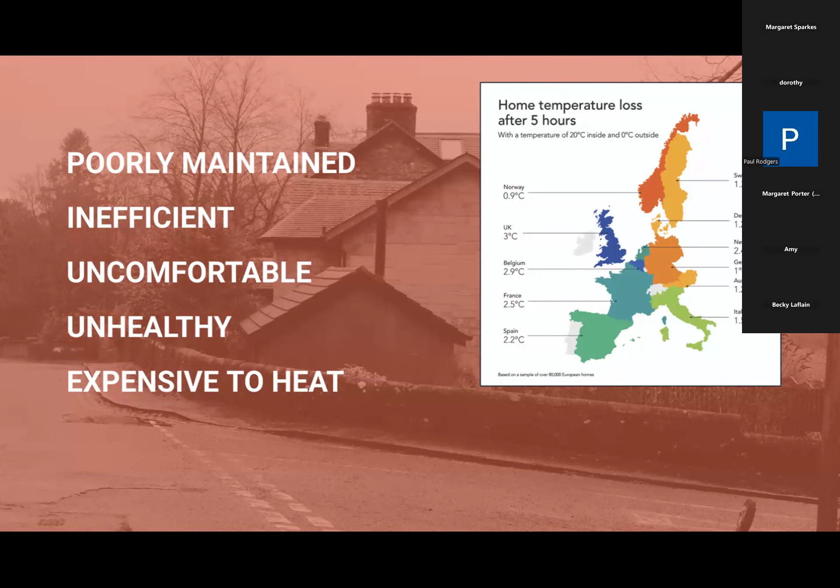And in addition to that, we also have homes that are not in a great state in terms of being poorly maintained, inefficient, not necessarily very comfortable or healthy, and I think most people will agree that they're fairly expensive to heat. And we also know that compared to our European neighbours, our housing stock is quite poor, and the thermal performance of our housing is quite poor.

And because the vast majority of homes that will exist in the future have already been built today, we know that we can't demolish and new build our way out of this. The only option really is to retrofit our existing building stock while making sure that we're building new homes that are low carbon and energy efficient. In other words, the only option we have is to retrofit.

So retrofit is a combination of two words, means to retrospectively fit, and you might retrofit a ship, bring it into dock and bring it up to date, perhaps it's a military vessel, but we're not talking about ships, we're talking about homes. And so for today's discussion, we're saying that retrofit is fitting new energy efficiency measures and renewable heating into an existing building.

And the three dimensions that we like to talk about is low carbon heating, which in almost all cases means installing a heat pump, insulation, and ventilation. And the great news is that when you do this, you bring a whole lot of benefits, improving the issues that I mentioned a few slides ago. So it's going to be a more comfortable home, a healthier indoor environment, lower environmental impact, and lowering your bills, almost certainly.

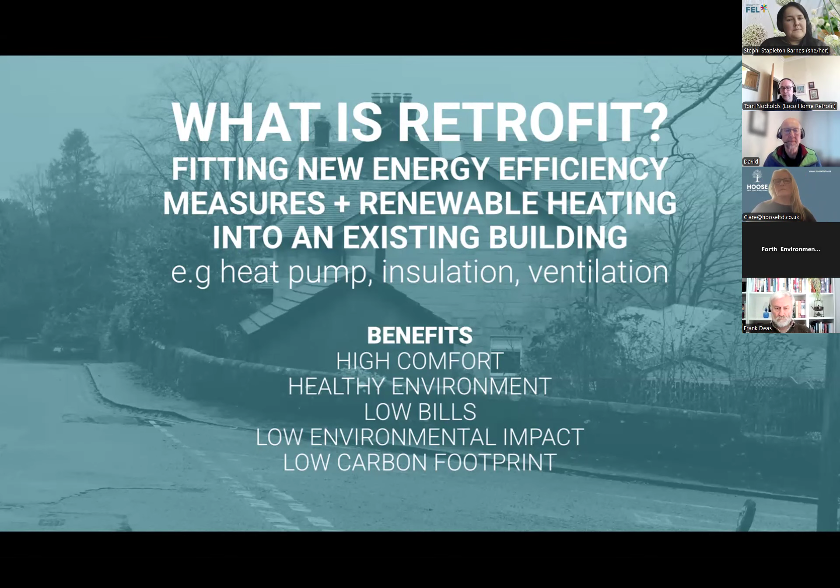The problem is that retrofit is expensive, complicated, risky, and it's just generally a really difficult process. And that's why Loco Home exists. That's what we set up to do. And our mission is to make better retrofit more accessible to more people with a strong focus on locally in Glasgow.

And we're a climate change organisation. Our primary purpose is to address that 34% of carbon emissions that comes from our homes. And the way we view it is that it's definitely warming. It's definitely us. We're absolutely sure about it. And the situation isn't great, but there's definitely things that we can and should be doing.

And in light of that, I think that really you've got a choice as an individual or a household to do nothing about the fact of climate change or do something. And importantly, if you don't engage with this and you make no decision, you don't do any planning, you are doing nothing. So it's important that people understand that climate change is something we should respond to, and that they really should be making plans for.

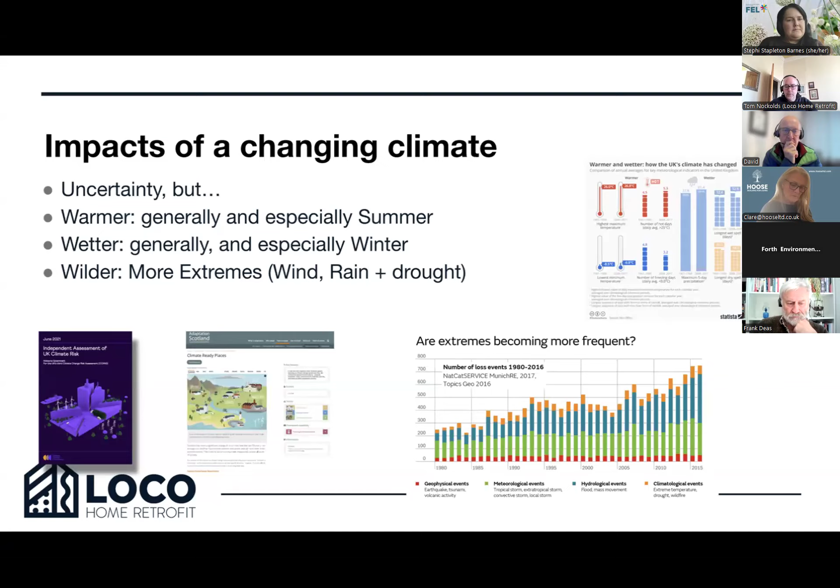So I'm going to run through for the next maybe 5 to 10 minutes. I'm definitely not going to be running over on my time today. I know that's not even an option. But I'm just going to be running through that structure: warmer, wetter, wilder.

And these slides are a bit of a repeat of the content that's in that document, and a bit of a repeat of the material that Chris Morgan presents in his webinar. I'm not trying to repeat what Chris is doing in his webinar. I'm merely trying to introduce this resource so that people understand what it covers and why it's so valuable.

I should say that I'm not a building expert. I'm a community social entrepreneur, and anything that I'm saying today should not be taken as advice on what to do for your specific home. This is just general in its nature, and I'll refer you back to the original report.

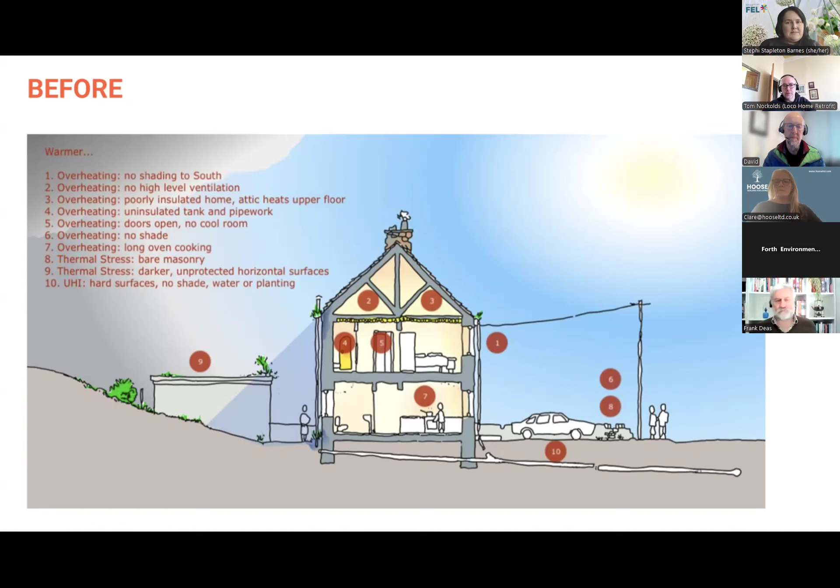So for example, to counteract overheating, we need to avoid situations where we don't have shading, that we don't have a lack of ventilation in our homes. A well-insulated home is also going to protect us from the heat coming in. We need to make sure that we're avoiding situations where there's no shade, introducing heat unnecessarily into the house through things like long duration oven cooking, and looking at the materials of our buildings to make sure they're up to increased temperature extremes, and making sure that in our broader urban environments we've got less hard surfaces.

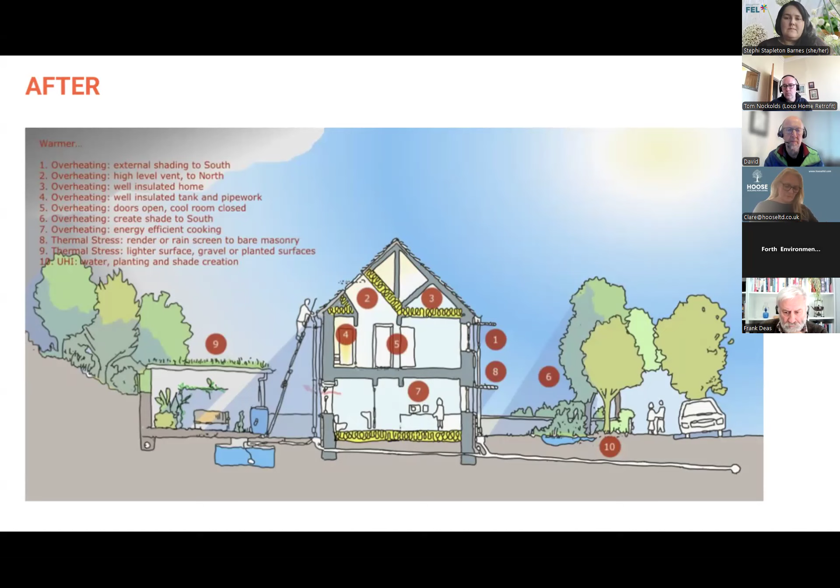You can see the same house with all of these measures, all these issues dealt with, starts to look a lot different. We've got much less hard surfaces, we've got more trees, we've got better maintenance, we've got the insulation. We're putting in relatively straightforward measures like green roofs, and we've got water buffers and water storages in the environment.

In terms of wetter, what we know is that a wetter and warmer environment means that we have more plant growth, and that can cause issues, particularly when we have uncontrolled plant growth growing in or near buildings. More likely to have rain penetrating into the fabric of the building. That can happen for a variety of reasons, because rain is being driven against the surface of a building, because it's splashing onto the surface of the building, or the drainage system, rainwater goods are not up to the job.

We can have increased wetting and drying cycles, which makes it even more important that we're using breathable, vapor permeable fabric in the retrofit of our buildings. In some circumstances, we need to be making significant plans for how we deal with flooding. In all circumstances, we need to think about flooding.

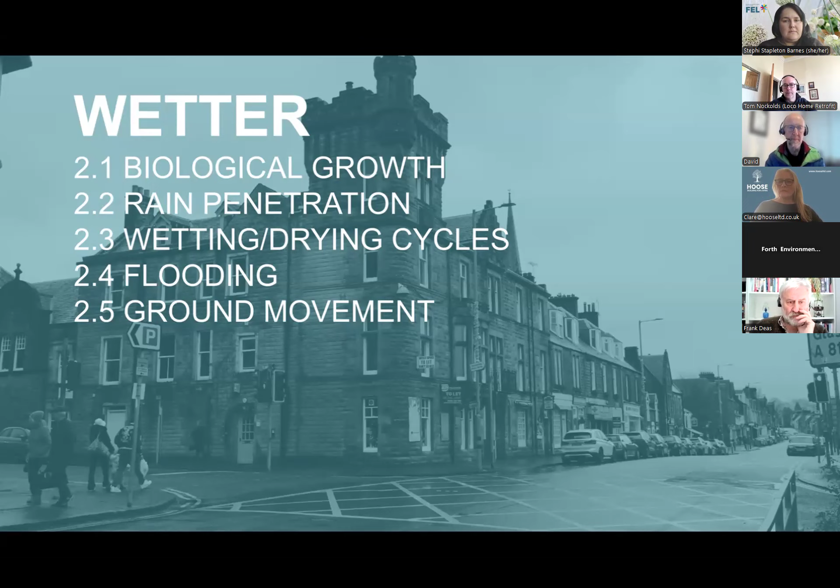And for some houses in certain locations, we need to be really mindful of ground movement, so things like slippage of land or worse. And so again, we've got these two diagrams, and I'll jump to the second one because it's kind of nicer to talk in a positive, but we can see we have fairly straightforward measures that we can do. A lot of this is about maintenance, making sure that we've got good access for maintenance and our homes and the surrounding environments are well maintained.

So good fixing points for maintenance, good access to drains, make sure that you're maintaining your roof and your gutters to remove plant material. Make sure that your home is well ventilated, because if water is going to be getting into the building at a higher rate, it needs to be able to get rid of that moisture. The roof is absolutely critical.

In some circumstances, you might need to consider new surfaces on the external of the building to protect against driving rain. We might need to think about changing some other more design features of the buildings to prevent rain from reaching the surface of the building as well.

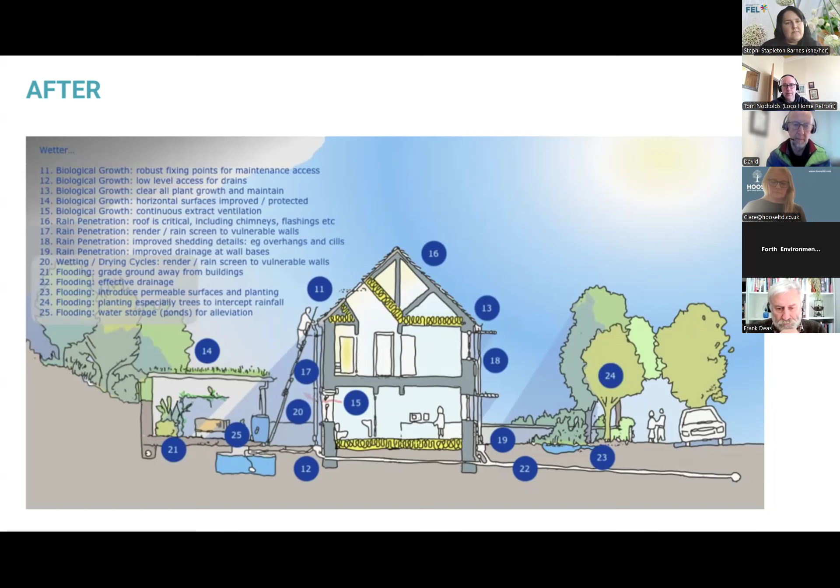And then in terms of flooding, there's a bunch of local things that we can do. Make sure that we've got effective drainage, try and create soft surfaces that soak up the water. Planting trees is always a good idea. And there's a key point that Chris makes, that while there's some small number of circumstances where trees can be a problem, particularly in wild weather, that's only a really small issue compared to all of the benefits that trees bring. We definitely want more trees in our environments. They help with a bunch of these problems.

And then finally, things are going to get wilder. Things are going to become unpredictable. A lot of things we've spoken about, we don't necessarily know when they're going to happen, but we know that when they do happen, they're more likely to be more extreme. So perhaps hard to believe, but there is increased chance that there's going to be droughts, even in Scotland, and there's things we can do to prepare for that. And we've more recently experienced some pretty serious storms: Storm Éowyn earlier this year, and then the storm that impacted the East Coast a year or so before that.

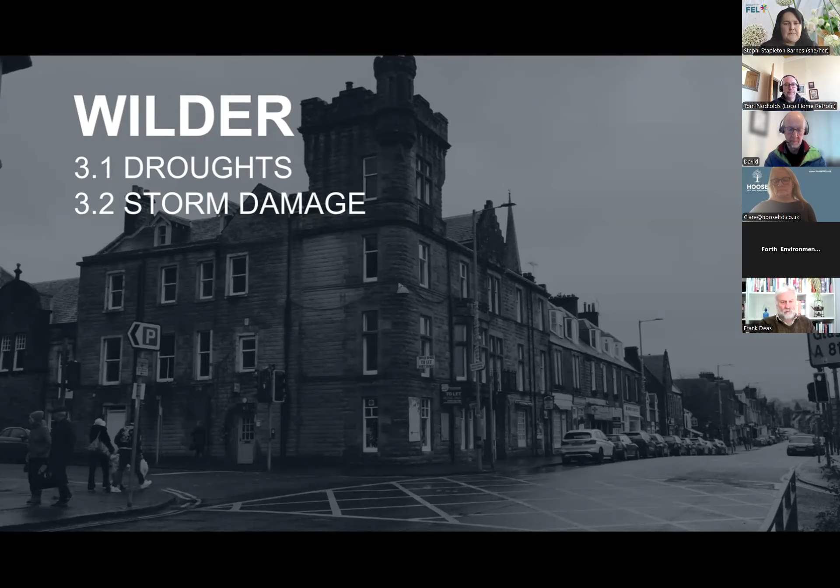So a lot of this again is about maintenance, but when we think about rain, how can we store that for later? Perhaps people in Scotland and the UK are going to need to start thinking more like Australians think, where you need to have local storage of your water in your garden to be able to water your gardens. What are the sensible ways to use water in these environments in the case that a drought was to come along? And we just generally need to be making our homes a lot more robust.

And I think the point that Chris makes is there's a lot of things that are common sense. You can walk around your house and just use your powers of observation to identify the things that are likely to be a problem in a storm event and try and resolve those before the storms arrive.

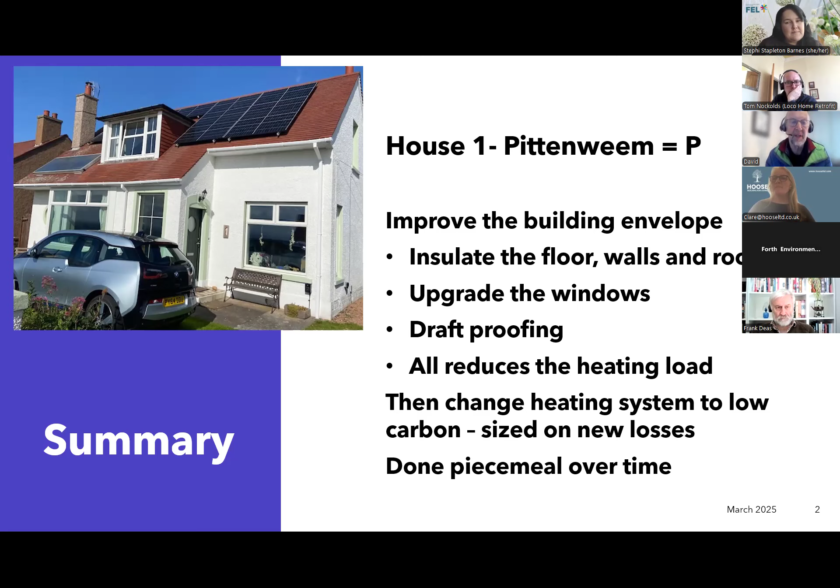So looking at the first house, we improved the building envelope. We insulated the floors, walls, and roof, and we upgraded the windows, improved the draft proofing to reduce our heat load. This was done over 20 years, and we did it piecemeal. We then changed our heating system to a combi boiler. Then we changed it to a heat pump, and that was done after we installed triple glazing on the front of the building.

So house 2 is in Callander, and we had different priorities. So first thing we did is we spent a year investigating the house. We did thermal imaging, we did an air pressure test, and we did nothing for a year. And now we've had a new roof, which makes us a bit more stormproof. We've installed solar PV and battery, and we are installing an air source heat pump.

As I speak, we are 9 degrees centigrade in the house. I'm sitting with a little fire next to me because we've taken our boiler out and the new radiators are going in right now.

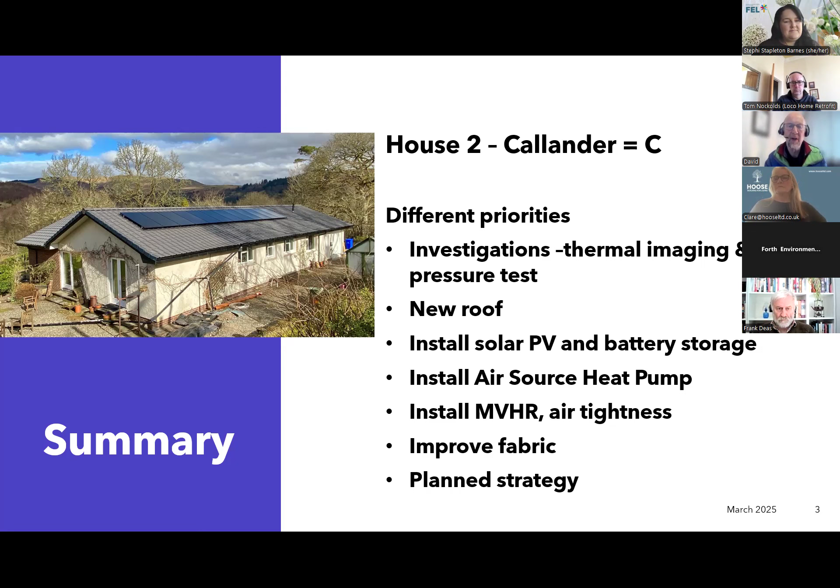I will be installing a mechanical ventilation heat recovery system, and we'll then be really improving the air tightness. Then we're going to be improving the fabric, which is a planned strategy. It's not the normal way around of doing it, but that's what we're going to be looking at for this house. So what do the investigations look like?

The left screen shows the door sealed up with the fan test to pressurize the house to 50 pascals and then depressurize the house to 50 pascals. I then went round with a thermal imaging camera at the same time, looking at where cold air was pouring into the house, and then went round the outside when we pressurized the house to look at where hot air was pouring out.

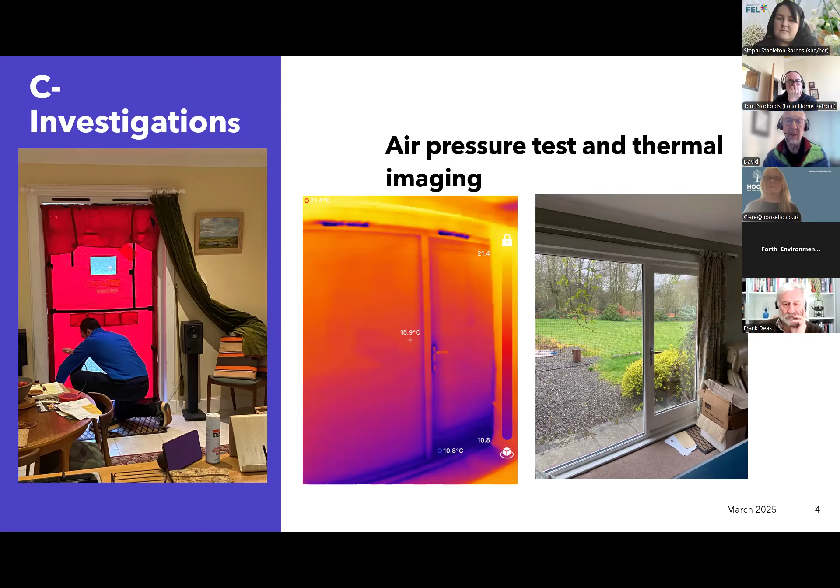So here you can see the trickle vents showing a dark image, and then a lot of drafts around the bottom of the door for this particular patio door. And that gave us a lot of very valuable information about where the air leaks were and where the cold spots were in our house.

Going back to Pittenweem, we started pulling it apart. When they put the triple glazing in on the left, you can see the cavity wall insulation in the middle of the wall, and it's very partial at that point. So one of the guys putting the windows in filled all those gaps and made sure that was okay. So we had it commercially done, but this was about 15, 20 years ago.

Under the floors, we went through and my wife spent several weeks under the floors, carefully fitting polystyrene up under the floors, and that made a big difference. So that's what that looked like in the solum underneath the ground floor. So we used polystyrene for that.

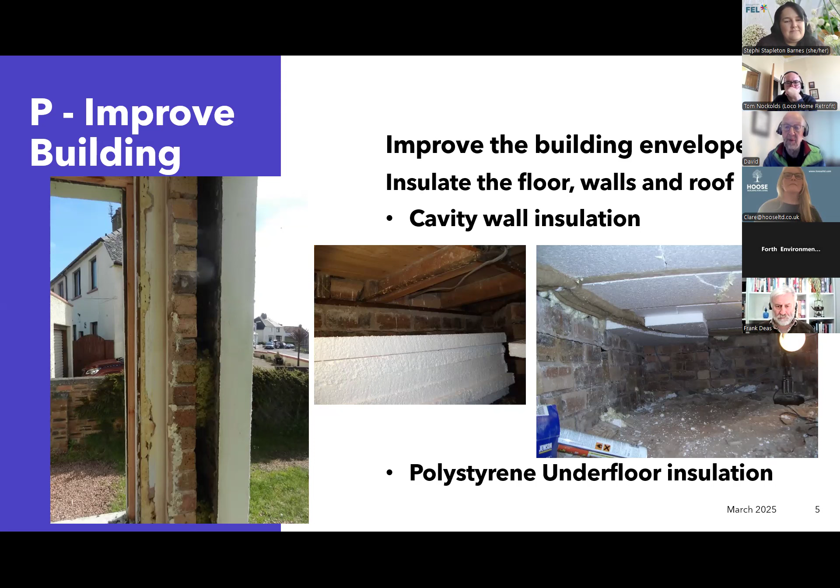Upstairs, we pulled all the plasterboard down and installed Kingspan. So in that ceiling and a coombed area, and we tape sealed all of the area, put the plasterboard back, and then replastered. So fairly invasive stuff, but it made such a huge difference.

I did it after we stayed at a friend's house who'd done that themselves, and it was so nice to be in their house, whereas it was cold in ours. So the bedroom stays cold in summer and warm in winter.

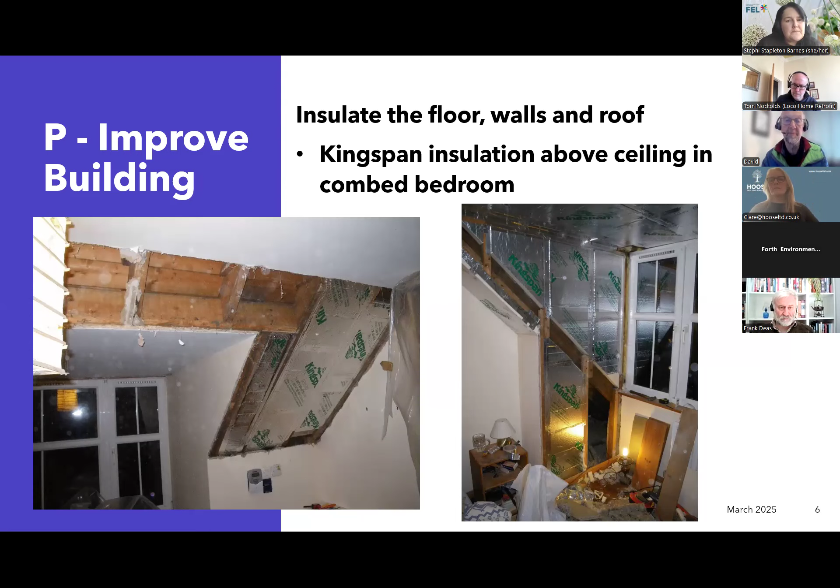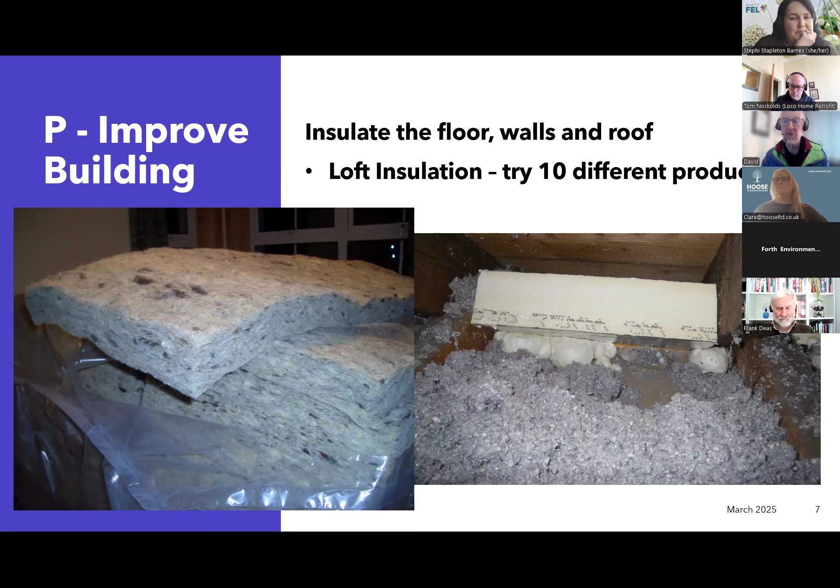And then in the loft, we tried 10 different types of products. I worked as a sustainability manager at the University of St Andrews, and I wanted to know about these products for putting into the university. So we had Thermafleece and Warmcel, which is newspaper that's been shredded and is a work of the devil. I wouldn't go anywhere near it again.

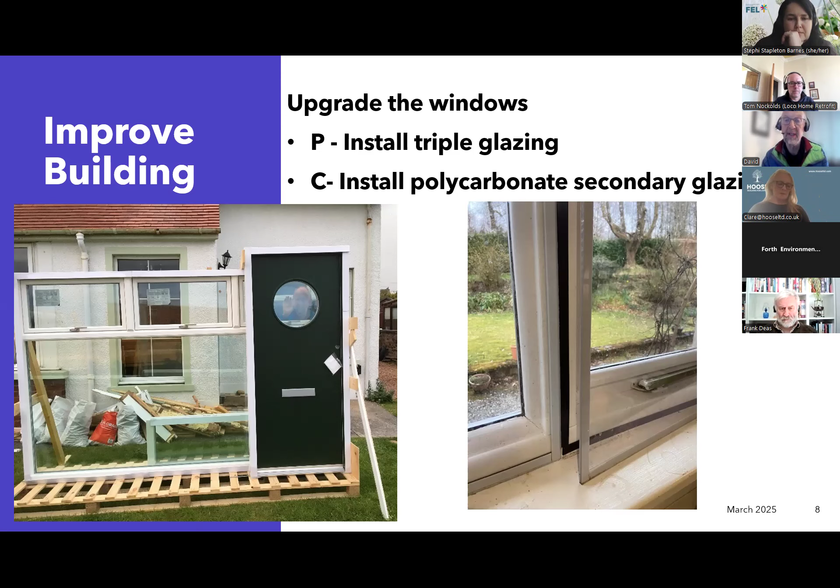Here, in Pittenweem, we installed triple glazing, spent a lot of money, high exposure house. We needed it to minimize the drafts. And in Callander, I'm just very cheaply installing polycarbonate sheets, cut to size, and stuck on with sticky back magnetic strips. Very easy to remove, and that's actually made quite a difference here. So that was a very simple thing to do.

So we then improved the heating system in Pittenweem. We had the solar thermal panels on the roof, a heat pump. We were looking at air source or ground source, and then solar PV, which lowers the carbon but doesn't lower the heating in the house.

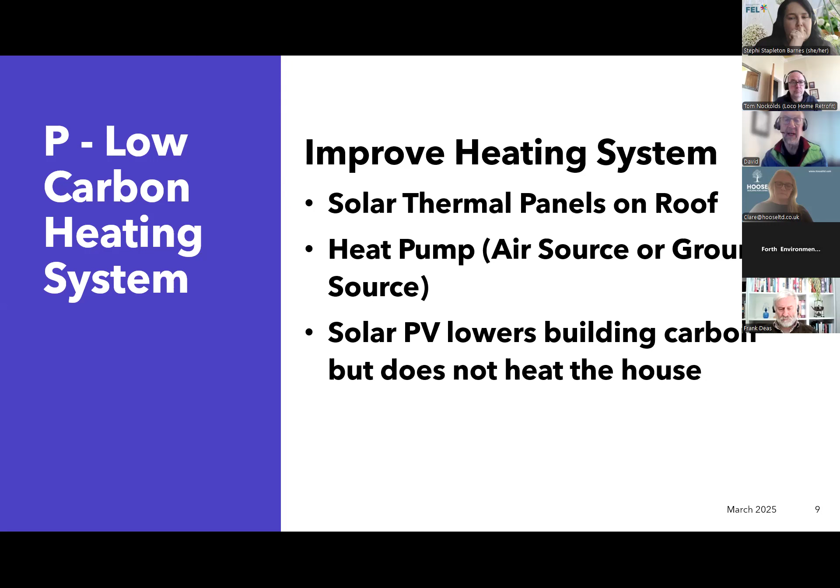So solar thermal, that was the solar thermal panel, which we put on fairly early on in Pittenweem, and it achieved 75% of our hot water demand throughout the year. It is really quite effective. Even in winter, it was bringing the tank temperature up from 10 degrees to 25 degrees, so that the other heating systems didn't have so much work to do.

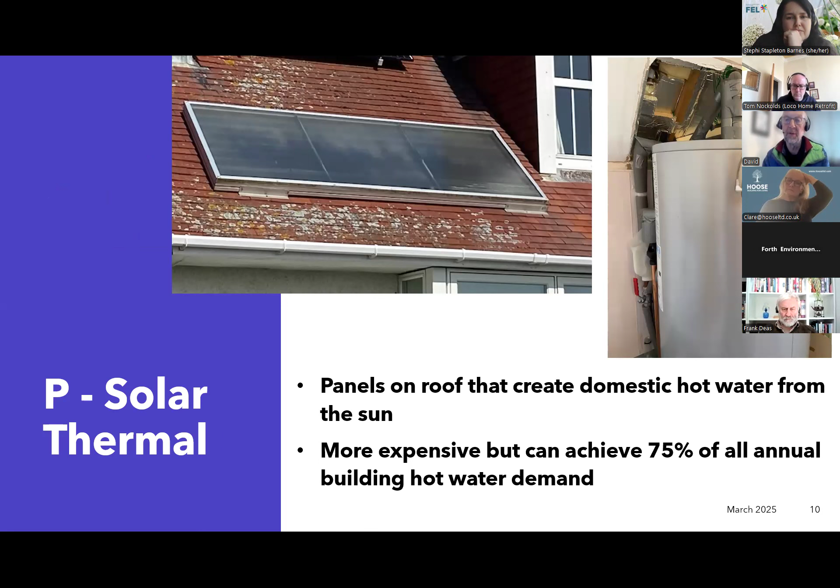So that was good. And then we installed a 7 kilowatt heat pump and oversized radiators. At low temperatures, the radiators need to be about 3 times the size. So we put a lot more radiators in. We were worried about it being overpowering, but actually you don't notice them after a while. And you get a very low temperature, cozy heat.

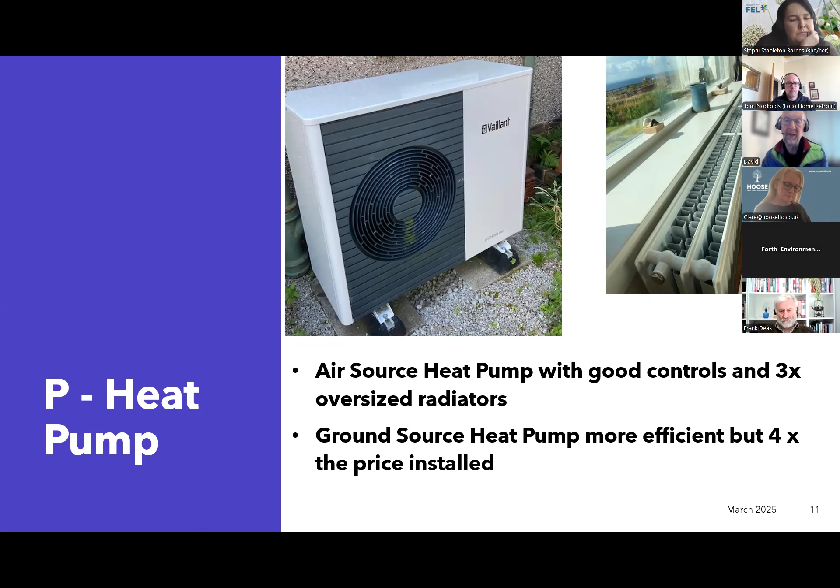It's really nice. We did look at a ground source heat pump, but it would be significantly more expensive to do that, to drill the boreholes, and the efficiencies wouldn't have made a payback for it. So we put the solar PV on, generating electricity for free, and then a small battery system in our loft, which stores the energy for when the sun was not shining, as that was the strategy for that house, so we could then use it during the day.

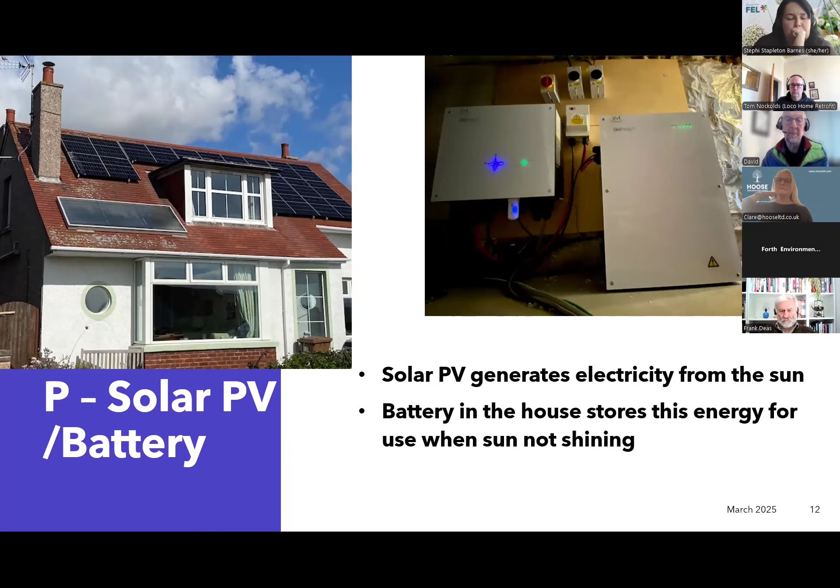For Callander House, we've got a larger roof, and so we've installed 5 kilowatts of solar PV panels and a 13.5 kilowatt hour battery, which is significantly larger than the last one. This one, we're paying 8p a kilowatt hour at night, and we actually get 15p per kilowatt hour to export our solar.

So we're using the battery to charge at the night rate and run our house, run the heat pump when it's on, and the solar goes straight to export during the day or tops up on the heat pump. So the system will also power the house in an electricity cut. So we have a lot of resilience now. Being a rural house, we do get power cuts from seconds through to several hours, a couple of days, and we'll be able to run the house during the power cut.

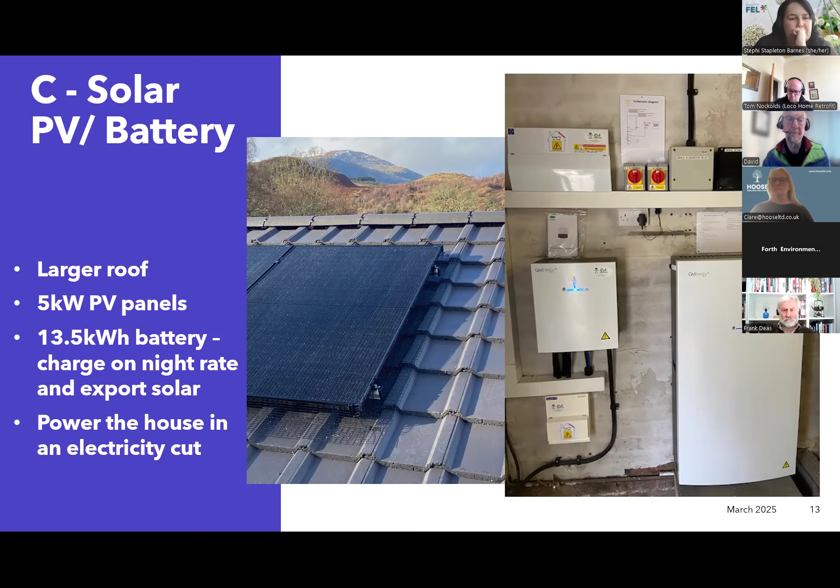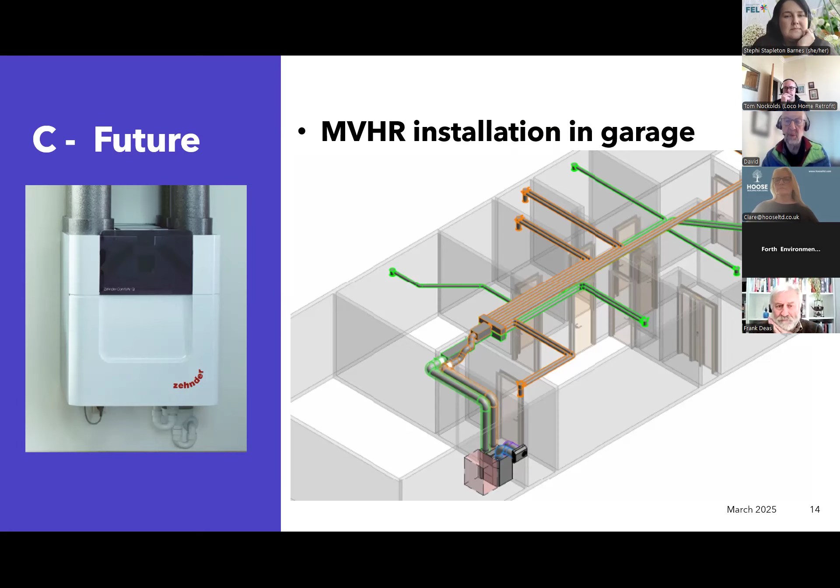And the future for ventilation, I'm going to install this mechanical ventilation heat recovery system. It's going to go in the garage. It's all being designed out. When the heat pump's installed and everything's back to normal, I'll then go and put that in the summer. We're going to have to clear all the loft insulation to do it properly because we want to airtight the loft. So we're going to wait till it's a bit warmer before we move that, and then we'll put all the insulation back in our loft.

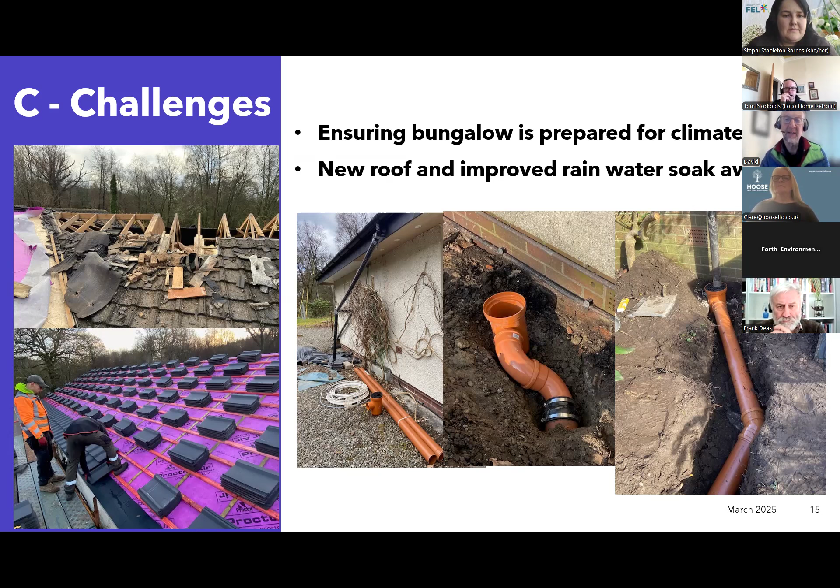So what were our challenges here? So again, we're trying to prepare our house for climate change. So this is the roof going on to our bungalow, and we were looking at our rainwater soakaways, which didn't cope during deluges. So I've redug all of the pipes and relaid the pipes to make sure that they're all running freely and that the water can get away from the house. And then on the front of the house, we'll be storing that water remotely for use in the garden. But we just needed to make sure that, again, the house has got big overhangs, a lot of ventilation in the loft there.

Challenges here, going from natural gas to a country house where we're working on LPG with a big tank, a 2,000 litre tank. And it was sort of weird trying to work out our heat consumption. I'm used to having lots of meters, and here you're just photographing a dial and working out that 50% of a tank is about 7,000 kilowatt hours stored in it, and then you could see it go down.

But for us, once we've got the heat pump in, we're going to get the tank out, and they will only remove it if it's under 5% full. So we've been eking out the gas at the moment till the installers arrive, and it's now virtually empty. So the boiler went out on Monday, but that coordination bit was something that hit me, and I hadn't been aware of that before.

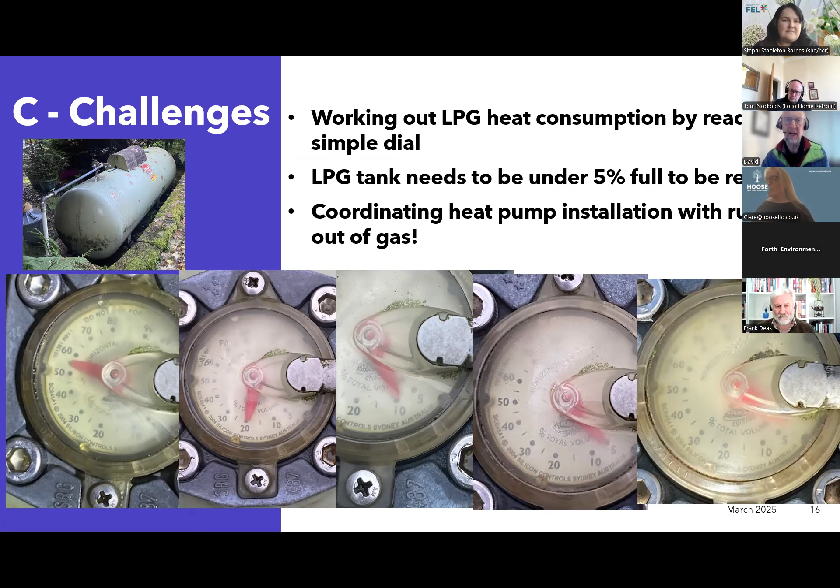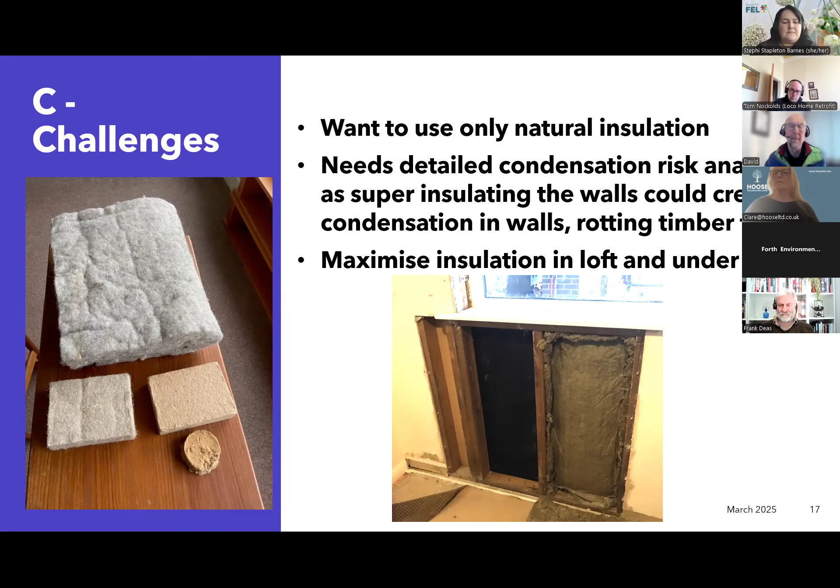But in the meantime, we're maximising the loft insulation and the underfloor insulation. So as soon as the guys are finished with the heat pump, we'll be under the floors working on that. As a comparison between the two houses, the Pittenweem house was 107 square meters. The bungalow's bigger.

The Pittenweem house was 1950s brick and cavity. The 60s was a cedar-clad frame, which then had an external brick put on it. We're very wooded and sheltered here, very noticeable in the storms that the wind passes over, whereas in Pittenweem it's very, very exposed. We had mild winters in Pittenweem, very rarely got frost, whereas we get a lot of frost here in Callander, and three times the rainfall. So we've got a weather station up monitoring that, and it's much, much wetter here.

So we took Pittenweem from an EPC of E to an EPC of A, and we've bought a house with an EPC of F, and we're going to bring it up to as high as we can. I'm not too sure what it will be. We're saving the planet one house at a time. And in terms of heating loads, we halved the heating load. This house has a higher heating load, and we're not too sure what we're going to get it down to, but we'll be using the heat pump. The annual bills in Pittenweem were only 450 in the last year we were there, so that's nice news. I like that. And we'll be working on getting our bills down here.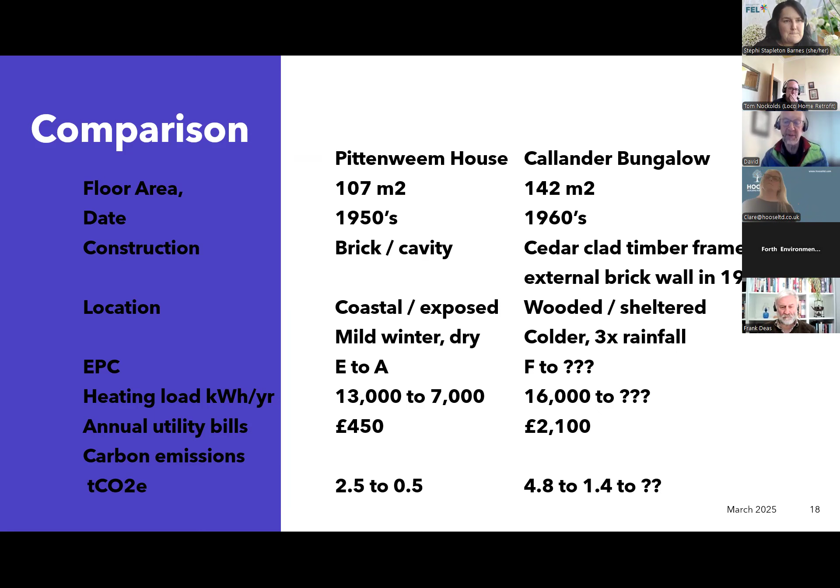So it's interesting what your motivation is. Do you want a cozy house? Do you want to adapt to climate change? Do you want to minimize your annual carbon? Or do you just want lower bills? Because a natural gas combi boiler with large radiators will actually reduce your bills, but it won't reduce your carbon. Then there's the supply chain ethics. Did we want a Tesla battery? No. We were offered one, but we went to a different company. And also we want to support as many of the local contractors as we possibly can.

Looking at the embodied carbon of an upgrade, we did think about knocking the bungalow down and building a passive house, and actually, no, that's a very high embodied carbon solution. We want to live with what we've got. And do you want self-sufficiency and to be off-grid, which is what we're aiming for here as much as possible. So that gives things that you might want to think about for any of your upgrades.

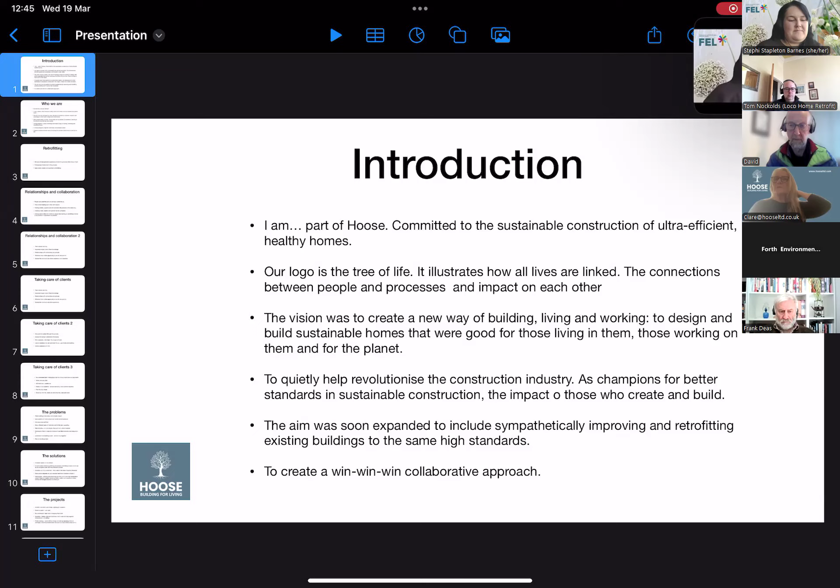Big aims were to quietly help revolutionise the construction industry, which is not a particularly friendly place often. And this is not to diss all companies, but some of the larger movers and shakers maybe would tend to build the lowest levels that are possible. We soon expanded because everyone within the company had a lot of experience with retrofitting, all of us personally and professionally.

We wanted to create a slightly different way of working, like a win-win-win, so that everyone who's involved is kept up to date. They know what's happening, whether they're clients or contractors or whoever it is, anyone that's involved in it. And with the sustainable underpinning strongly at the base of the company. So it does sound like a bit of a utopian fantasy, particularly in the construction industry.

And it was a dream, and it became a reality when two of the founders met at a network, something like this actually, but in person, and shared their vision. So it is not pie in the sky. It's based on many decades of experience, academic research, and knowledge in construction, design, and conservation. At the core of the original founders was an architect, an academic who's teaching in the School of Architecture in Liverpool, and a builder, coming together to share knowledge to improve ways of working and living. We also have in-house designers, engineers, fabrication and assembly teams, all that you might expect.

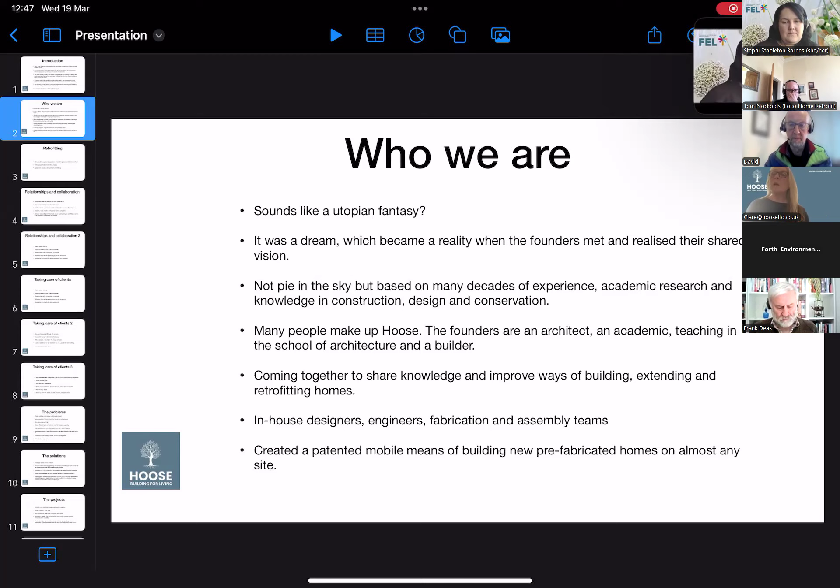Many of you will already have done retrofitting in your own homes or be about to do it. It can be quite a difficult and lonely process as you go from one person to the other. So we are under one umbrella, and people would deal with one person largely. Part of the new build aspect was to create a mobile plan, prefabricated homes that could be built on almost any site, but with minimal impact. In fact, positive impact if possible, low maintenance, low energy, low carbon, all of these things.

But as I said, we've never stopped retrofitting since Hoose was set up. Retrofitting is obviously important, as Tom said. It's the houses that are here. It's obviously much better for the planet if we can work with them and make sure that they work as efficiently as any new eco house would do. But we want to apply the same values and expertise to this.

Relationships and collaboration are a key part of how we hope to work. And I'm not talking just about our company. I don't want this to sound like an advertising thing, because it's something that we hope to spread. So it's from treating each other with respect within the company, whoever is working with you, but also spreading that out. So clients, suppliers, the whole supply chain, we check into to make sure it's ethical, responsible, sustainable as much as is possible.

And we also want to have a lifelong relationship with clients, so that it's as positive an experience as possible. Because you will know if you've done any of it, it is fairly isolating, and it can be a bit of a money pit. So we, as a team, are always learning. We think it's important to give back and share knowledge. We've got relationships with local schools and universities in Scotland, England, and abroad.

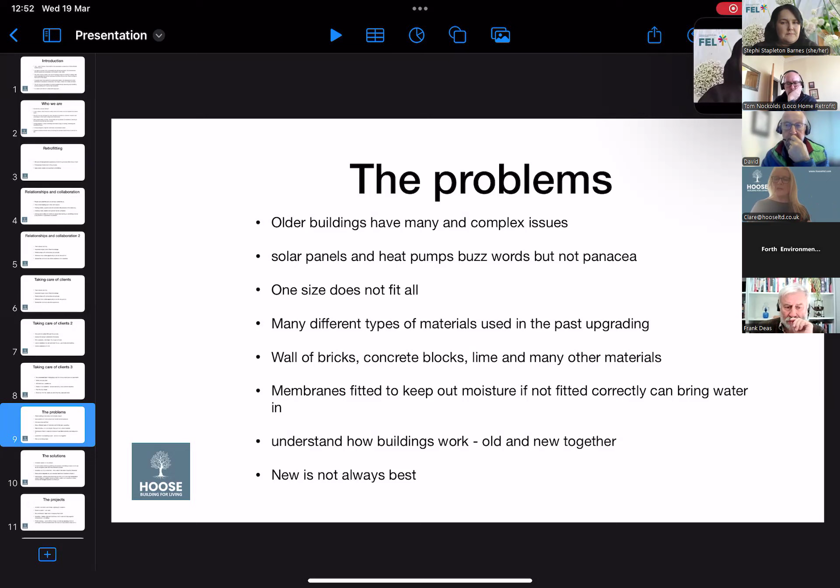For instance, membranes fitted to keep out moisture, if not fitted correctly, will actually bring water into your home. And there's so many different types of materials involved, and different upgrades. So one wall might have bricks, concrete blocks, lime, and many other materials. So it's like a jigsaw and a balance and almost an equation of dealing with all of these different materials, seeing how they interact, and old and new interacting together. It's not always the best thing.

So in some cases, and I'm not saying it's a magic wand or it's as simple as this, but in some cases, replacing your guttering and properly ventilating a damp home can be the most cost-effective and straightforward solution.

So even in insulation, if you have fabulous big thick walls, insulation might not make a huge amount of difference. And solar panels are fabulous. I mean, we have a company that do solar panels, but it's not for everyone. And it depends how much ground you've got for your heat pumps.

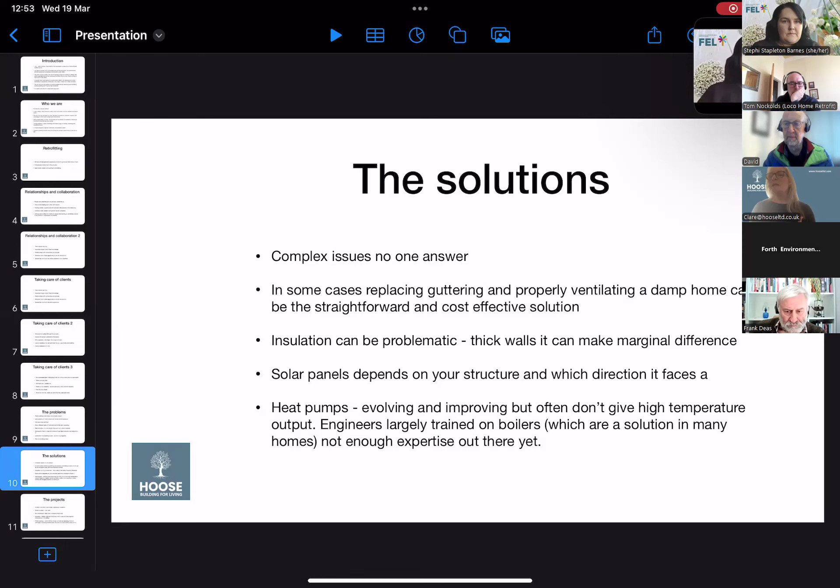I mean, they're evolving and they're getting much more efficient, but finding the people to fit them, engineers, there are many, many boiler engineers, of course, in this country, but not quite enough for the expertise maybe that's needed for the different types of heat pumps, especially as the heat pumps move on and get better.

Some of the projects, there was one that wasn't us, but a new school built, a Scottish school, and they used cheap lightweight insulation, which met one need. So it ticked a box because it was fairly easy to use. It wasn't too expensive, so that was ticked. And great on paper, but cost-wise, it didn't work out to be so good, because the overheating meant they had high costs to try and bring down the temperature within the building.

Whereas more, when I say natural, more traditional, old-fashioned maybe, but now very modern types of materials, hemp, sisal, wool, are more mass. So they help to regulate the temperature of your building.

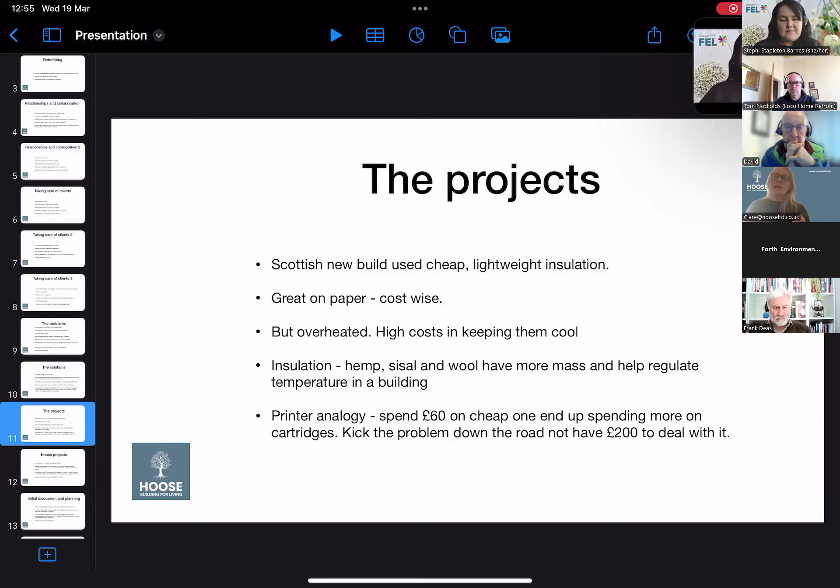So like the printer analogy that I use, when you don't have much money, a £60 printer sounds like a great deal. And it is a great deal when you need it right now. But it tends to cost you more in cartridges, they don't work so quickly, and you're just really kicking the problem down the road. And it's a hard fact of life, particularly if you're facing a retrofit, that you have to look at the whole issue. You have to look at where you are, the surrounds of your home, all the materials within it, to see what you actually can do and can afford, and what's going to work.

So some of our projects, we've done a wide range, from a 100 square metre cottage near Crieff, to the other side, which is just outside Stirling, an entire retrofit of a 600 square metre steading. And that's been a very big project.

We also got caught up in bats nesting. So it's a maternity wing in the old roof. So that's all had to be dealt with and built in, so that the bats can come back and still nest and do their fabulous bat business, while still repairing and renewing the whole roof. That particular retrofit also exposed a lot of things that had been done in the past not so well.

So anyway, I'll see the time. I'm going to be very cognizant of the time.

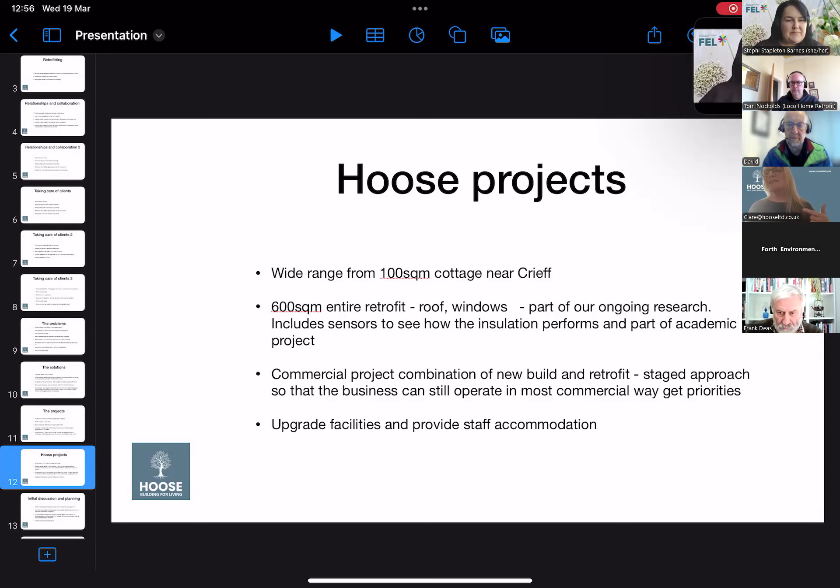There's also a commercial project, which is an old and new thing, and trying to find the best ways. They want to keep running, obviously, it's in hospitality. But I'll go back to what is the most important thing, I think, for you: for someone to spend time with you, to see what's needed and wanted, and see what the restraints are in your budget, being as realistic as you can, because there are things that will make a difference within any budget.

But for instance, any decent contractor, builder, architect, and we would certainly know this, if you had a leaky roof and wanted a new kitchen, they wouldn't do it. They wouldn't give you a new kitchen unless the fabric of your building is secure. So also we'd be looking ahead to the running costs of your house.

As I said, in that bigger retrofit, we're doing some research and an academic programme. We've got a partner there, there are sensors going in, and we'll have sensors, video imagery and videos, so that we'll have the data for how these different types of fabrics work.

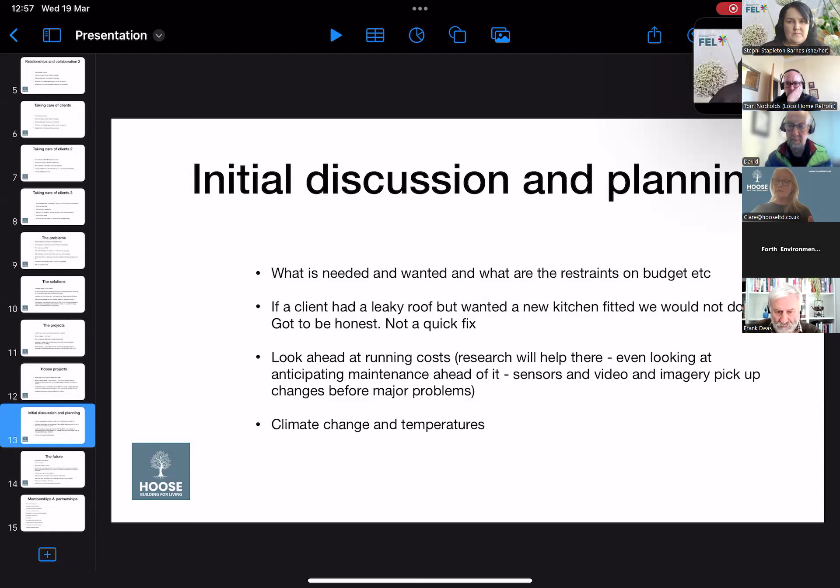And also we will keep these sensors in so that we can look ahead, before there are problems in old buildings, before the damp or anything gets to a certain stage, we can move in and hopefully deal with that quite quickly, so that in the same way as a new build might be low maintenance and cheaper, the same things can apply, with the underpinning that it's been better for the environment.

But I would say it's not an easy fix. You've got to be realistic. There are appropriate solutions. I know sometimes if you're in a home that's needing them, it's a big problem.

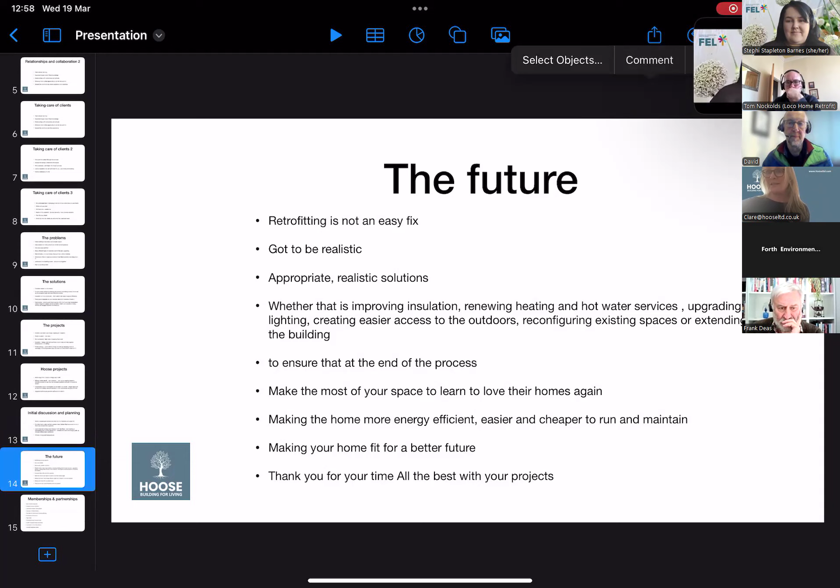And thank you everyone for speaking today, because I think all three really complement each other and show different examples of how support is there before you have to, hopefully you have time to plan these retrofitting journeys. But as you highlighted, sometimes it has to be quite responsive as well. So in the last couple of minutes, does anyone have any questions for our speakers?

I've got a nice comment from Tom, if it's okay to read out this one. The one thing I love about David's Calendar House case study is it demonstrates so clearly that the single biggest carbon emissions reduction action you can take in your home is to stop burning gas. So therefore, if carbon emissions reductions are a priority for you, you should give serious consideration to taking a similar path as David and get a heat pump installed ASAP. So thank you for that comment.

That's a big if. Because if something else is what you're trying to achieve, such as to improve the comfort of your home or something like that, a heat pump may play a role, but there might be other things that are more important for you to tackle first.

Thank you. I did have one question that was linked to any experience using funding. So this was on our Eventbrite. Someone had asked about how to work with Home Energy Scotland grants and loans, given they have existing renewables that require significant upgrades or improvements for their needs. They've recently purchased a property and want to make it more energy efficient. I don't know if anyone can offer any quick feedback on that.